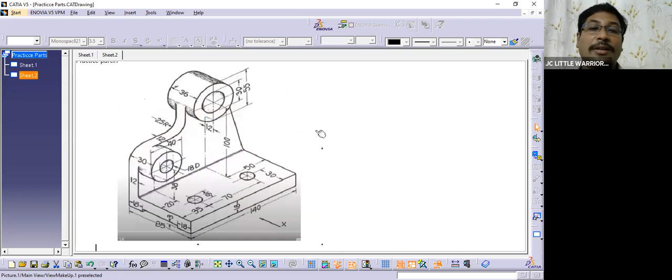Only the last operation, the pad operation or the stiffener operation, was left over, and before that it crashed. So any issues, you can message me whoever completed your model, or if you want me to repeat the creation of this sketch and all that we saw in the last session. If you want to see it again, I'm ready to take a quick session on that before going to the new part. So, what's your choice? Shall I start with a new part, or do you want me to just refresh what we did in the last session and then go to the new part? Please decide and tell me in 2-3 minutes.

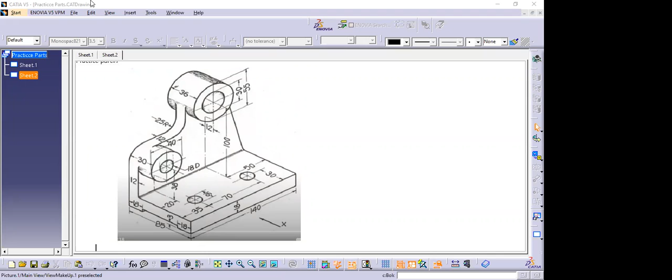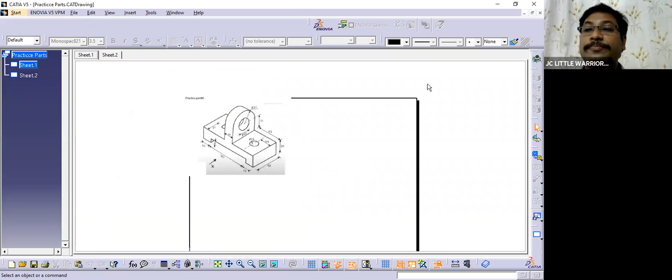Guys, all good? Shall I proceed with the new one today? Okay, so let's have a look at this new part. Is it visible? If yes, please have a look. Just study this. Take 2 minutes and study this. We'll model this part today.

Okay, so let's have a look at this carefully. What is the direction of view? That means which view we can consider as the front view, how we can take the axis system, and where we can consider the origin. And in which direction it should be extruded, the pad creation, how we can create it. We have three holes in this part. How to create these three holes, and also a cutout at the bottom of this part. Have you observed that there is a cutout of 6 mm at the bottom of this part? So how to achieve that cutout,

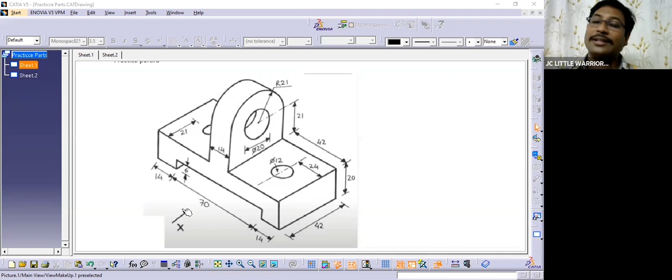But if that is their importance of the part, in that case we have to agree with them, because of the orientation of the part, the functionality of the part, and how it is sitting in the assembly. This part is not alone; it's going to be placed in some assembly where it has some functionality. So based on the functionality, there will be some change in the orientation, change in the basic rules. What we discussed are the basic rules.

If you're working on a particular project, they would have defined some rules, like for this kind of part, this should be considered the front view. There will be so many rules on that, but as of now for us, this is the front view. Why? Because the arrow direction is given, number one. That is one confirmation. And the second confirmation is you can see maximum details. You can find maximum dimensions from this view.

You can see the cutout details, the pad thickness details, and the rib at the center. You can see the 14 thickness of that also. The width of the part and the length of the part can also be seen from this area. So we decided the front view is this X direction, the arrow direction which they have given. Done.

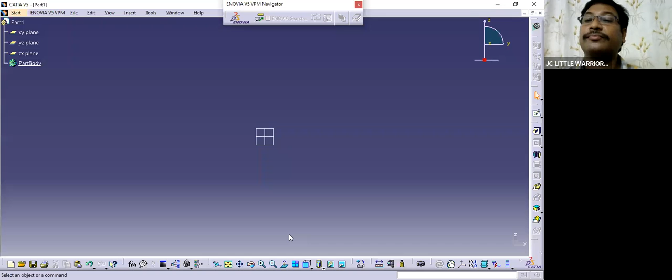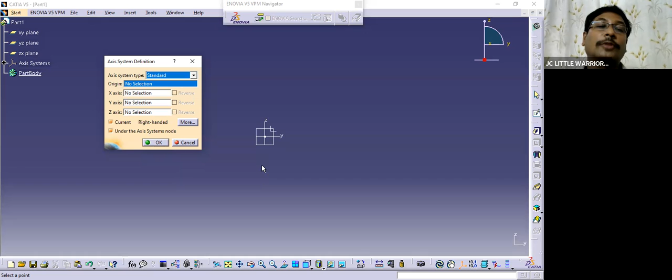Okay, that is decided. So here, maybe let's insert the axis system. Guys, directly here also you can insert. Have you seen that? The insert axis system, that also we can see. So as of now, standard, right-handed. Okay, as of now, standard we have taken. These are the axis system.

If you want to increase the size, let's increase it a little bit. I think it will be a little better if you increase it. Meanwhile, please decide where we need to consider the origin. Let me quickly increase the size of this. Infrastructure, part infrastructure, and then display. Let's have it. So now it is increased.

Okay, good. Now, guys, I need an answer for this quickly. Where are we considering the origin now, and why are we considering the origin there? What's your basic idea? I want to know that. Any answer? You can message me, or you can tell me in Hindi, Telugu, English, whatever language you want. Guys, waiting for your reply.

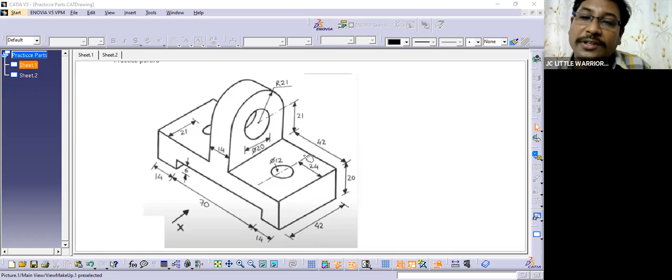In that case, if this face is not controlled within 0.2 - or if it is 0.3, 42 plus or minus 0.3 - this will become 42.3. You got it? If this face is not controlled, if you measure it from here with a physical instrument, with a scale or a tape, measuring it from this surface to here, or with some good measuring instrument - because you already deviated here, that 0.3 will get added here, and this will get extended. That means this will become 42.3.

Or if it is not controlled at all, if this is a big issue, then this will become 42.5 maybe - we don't know, because the surface is not at all controlled. That's the reason we consider this hole will be manufactured with the given tolerances. Yes, definitely it should be maintained - that tolerance should be maintained.

If it is not maintained, those dimensions are going to reflect in other parts of this part. For example, if this is not maintained, it will become 42.5, because you have deviated 0.5mm here. If this surface is manufactured 0.5mm to this side, then that will get added here, and all this part will get affected, and finally the purpose of the part will be lost. So the shaft - first thing is the shaft will not sit in this. If it is very loose, then the functionality of the shaft will not happen.

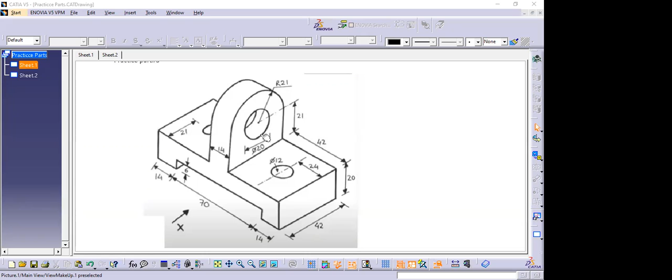Now this is a very important thing. These are the important things you have to understand. What we are going to do next in Catia is secondary. First thing is we need to understand the theory behind this.

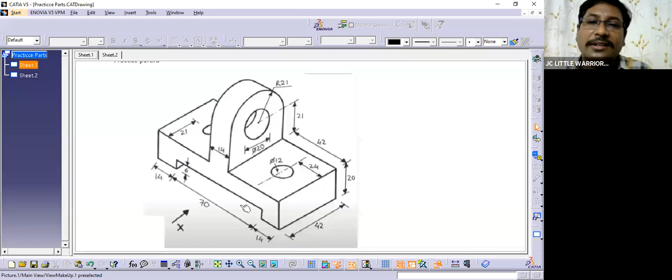You know the commands also now. You people are smart and you know all the commands, okay, what I'm using, so I know that. You people are very hardworking, you do that at home also. I'm proud of you guys.

Okay, so let's start with this. I'll switch off this here, this is something. I cannot see the screen, I'll switch off this for a while.

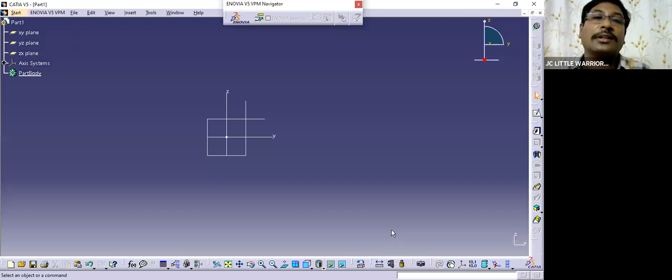Okay guys, let's start with this. Always positioned sketch.

Okay, now let's make it side by side and do it, so our work will be fast.

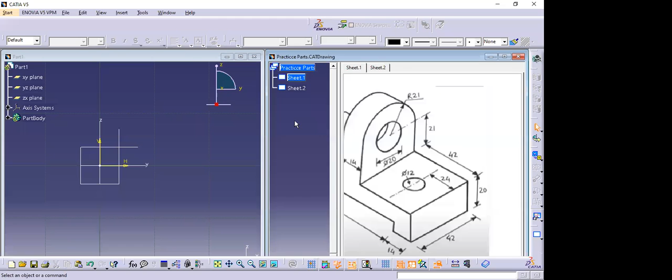Okay guys, so this is our front view. These are the front view.

Okay, so if you look from this direction, what all things are visible here? Let's start with this. So our center is this, as we decided, this is the important center, important feature of the part. So we decided this origin is that part. Simply I'm taking

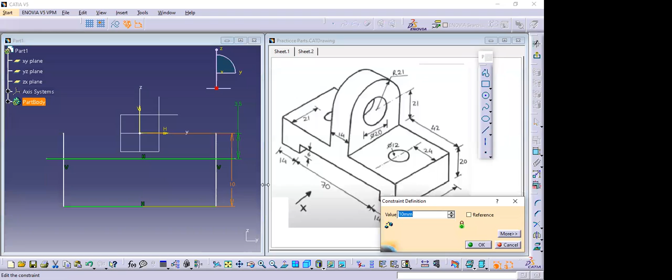41, is it? Let's see how you calculated. This is 21. 20 plus 21, isn't it? Fantastic. So up to here it is 41. Sure, this has become 41.

So what do we do, the top one should interfere with this. Okay guys. Now what is the width of this? 70 plus 14 is 84, 84 plus 14 is 98, sir. Okay, simply take this as 98. Let's consider this as 98.

So is this part centered at the mid of the part here? No sir, no. Sir, we have to take width as 42, sir.

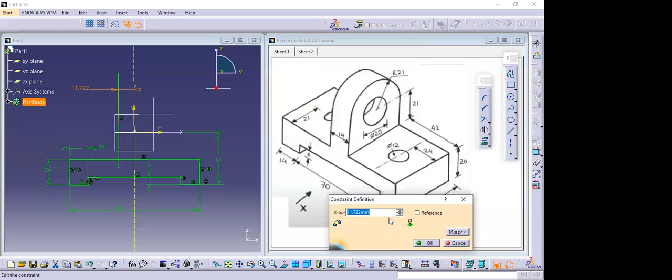Now again, this is at the center, so let's consider a vertical line. If it is blue in color, that means vertical. I just extended it till the profile. And what is the thickness? 14 mm. So let's say 7 mm here, and then mirror, 7 mm.

This is done. And what is the height we need to maintain? From here 21 mm. We need a horizontal line which will be 21 mm from this center. Now trim it; just double click the trim and start trimming. This is done. This side line is gone, so let's mirror it. Say mirror. This and this, done.

Let's have a look at this. So guys, have a look at this. Compare this. Is what we did right? Till here we have checked. All the dimensions are okay, the undercut we have given. This is also 6 mm maintained, and the top one which we have done is of thickness 14 mm, and it is at the center.

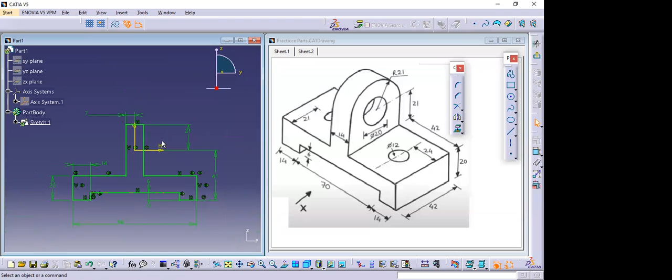That's the reason, since the thickness of this is 14 mm, we have considered 7 mm on both sides. So you saw how to use the mirror command. Any questions you want me to repeat, or is that okay? Okay guys, now let us check your sketch. It is closed, and everything is fine, so we can use the pad operation. Yes, please. So what should we do when the line is white?